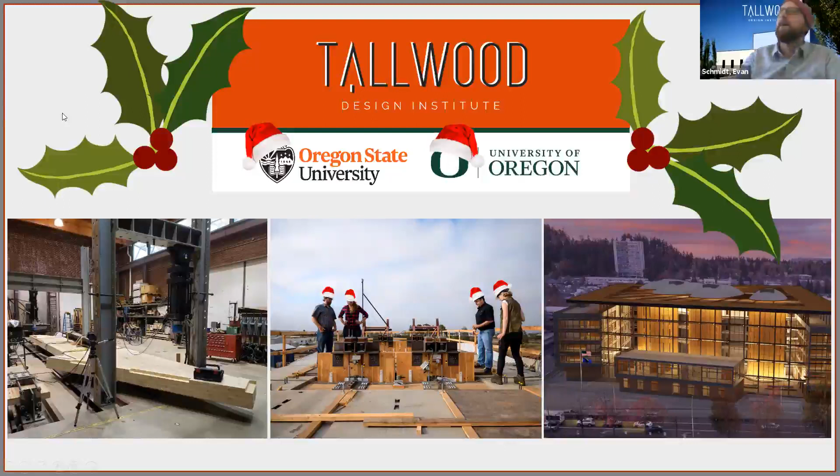I really want to emphasize that we engage in testing services. We provide testing services for anyone from manufacturers to fabricators, builders, architects, engineers—a pretty wide stakeholder base that we collaborate with on an ongoing basis.

And some of our new steel that's arrived here will be used for a 3-story test that Andre is involved in. Andre is one of our speakers today.

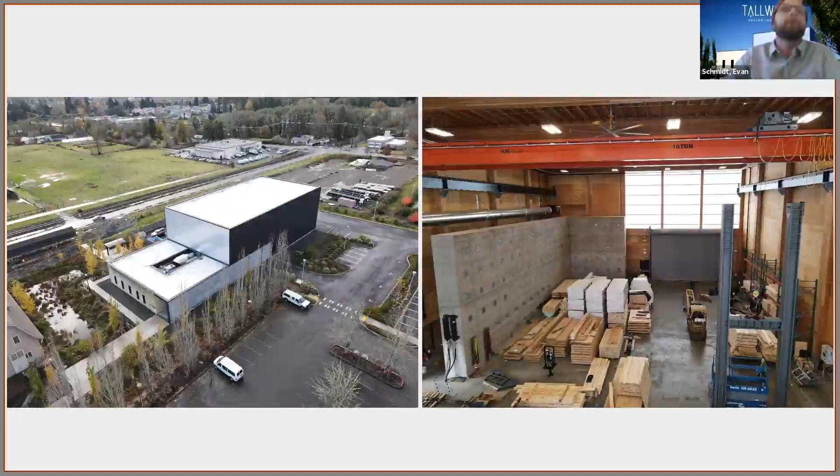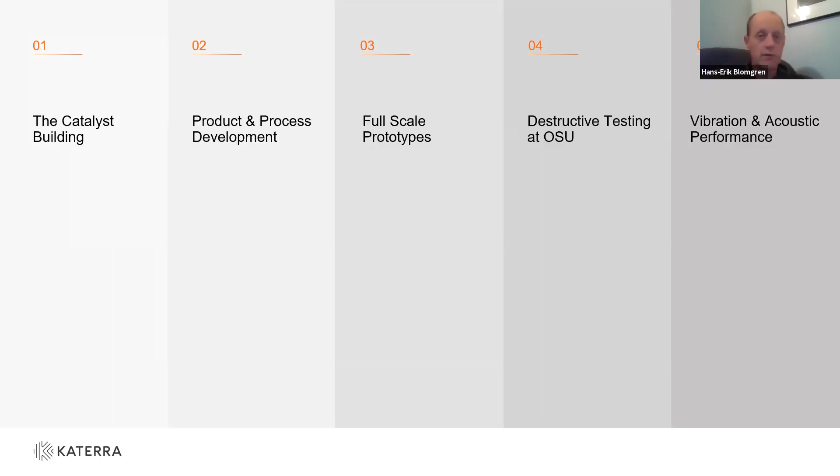I'll say also the project engineers of record, KPFF, are on the call. So when we get to the vibration and acoustic piece at the end, I've got one slide to prompt Reed or Jack to give a summary of how they approach the analytical vibration modeling for the floors. So with that, I'll jump in.

At this point in time, Catalyst had its grand opening in September, so we can now look at the building completed, even though that's not the way we had designed the product. It all happened in parallel, right? But it's a large scale, largest, I think, mass timber project in the state of Washington. Office and education use, that 30 by 30 foot column grid was a key driver identified early on, where in an education building, you've got to have that 30-foot span in a bay to create classroom spaces.

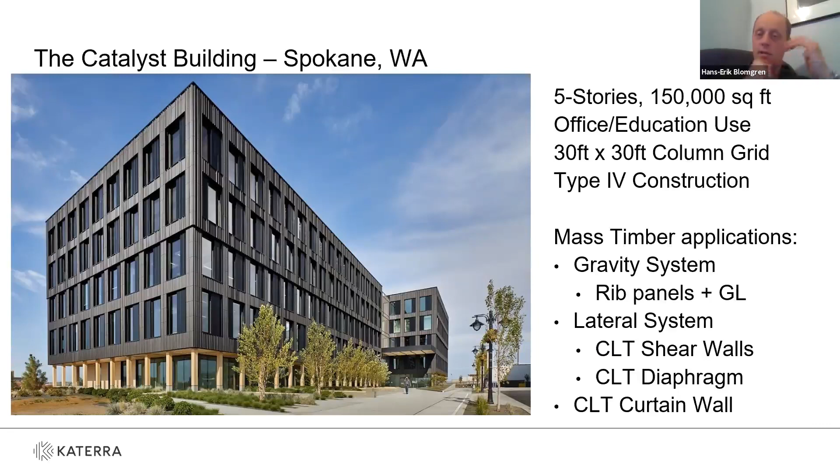A quick study in what would be a long talk to really highlight all of the timber applications. The gravity system is rib panels and glulam, which we'll focus on today. But the lateral system, which Reed has given this group a snapshot of in the past, is CLT shear walls. The CLT floors themselves are the diaphragm. So the design method used by KPFF utilizes the strength of the wood. And there's also a cool curtain wall system.

Run through a few pictures of the floor plan. A disciplined layout with 30-foot grids on the columns in both directions. The middle bay is then split with a glulam beam. So the CLT there is just a 5-ply spanning 15 feet. You can kind of see a dashed beam below, maybe over there. And then we go 30-foot spans on these bays with the rib panel. The core wall fits 14 feet wide, to allow a walking corridor and a high bay space for building services routing through the floor.

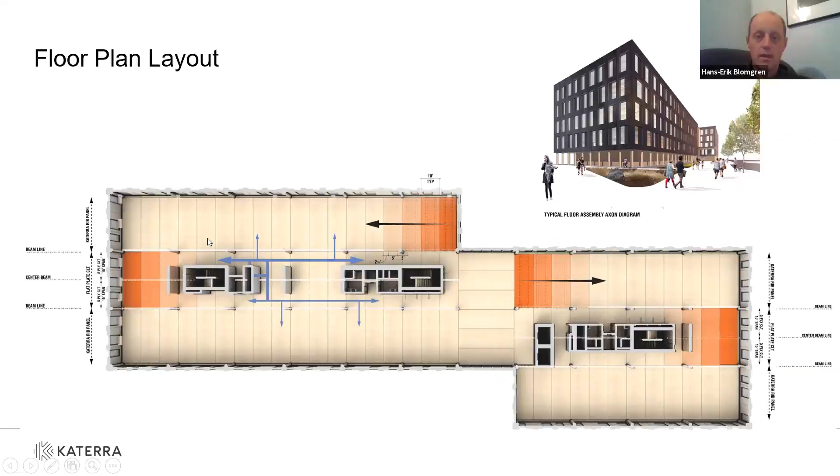Again, during construction, a lot of wood, all ground up, super exciting to finally see a project like this through and be a small player in it all.

Roughly 375 rib panels on all 5 floors. And then with the CLT panels in addition to that, those are all about 10 by 30 feet size. This is the first project we delivered our first 5-ply to. So our panels were defined around the first product we were going to produce, day 1, literally. So we had a 5-ply in the mix there. Obviously, we're certified now on 3 through 9-ply, but it was quite some nervous days. I was bald before I started at Katerra, but mine had gotten a little balder with some of the timing issues to deliver on this project.

50 rib panels a week were manufactured in our factory over an 8-week span. So the production of these rib panels exceeded the erection rate on site, but it went up fast. It was all off-site built, and it's a cool story.

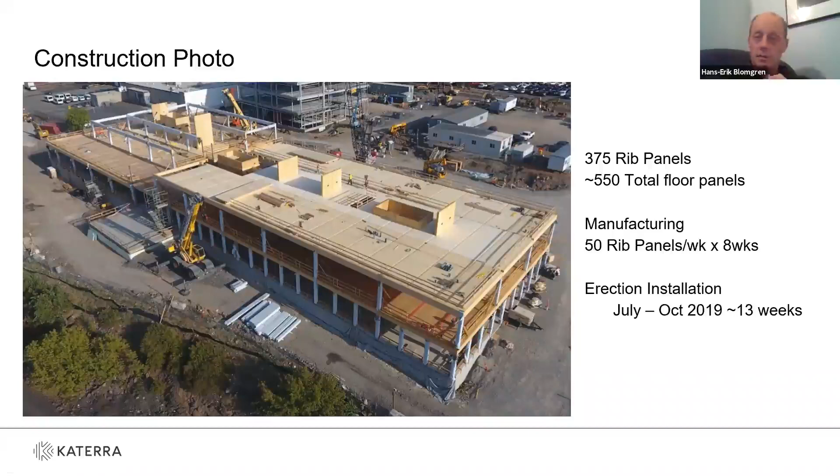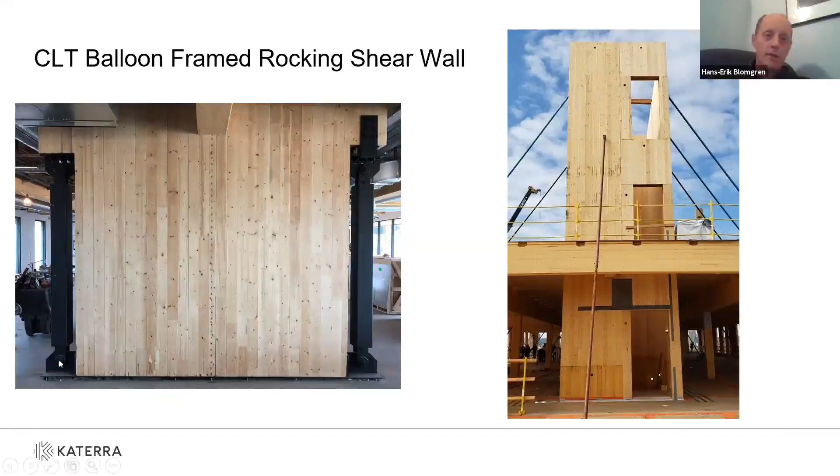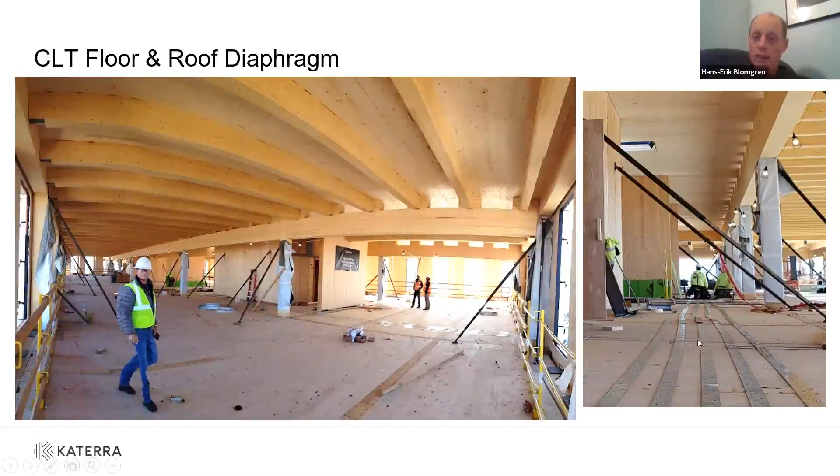Quickly, there's the lateral system: rocking walls, 5 stories tall, 14 feet wide, nonlinear static pushover analysis on the BRBs as the hold downs. That's item 1. The CLT floor and roof diaphragms were the diaphragm. So spline joints on the floor, Simpson strapping, collecting loads back to the core walls.

The curtain wall was partially built off-site in a factory near the site. So the CLT is a 3-ply backing, insulation, rails, all pre-installed. Here's a panel going up, 2 stories tall, nice connections to the supporting edge beams, and you can see the finished product there. So again, that was a whole product level of development that, well, 1 slide. We're not going to talk about it today.

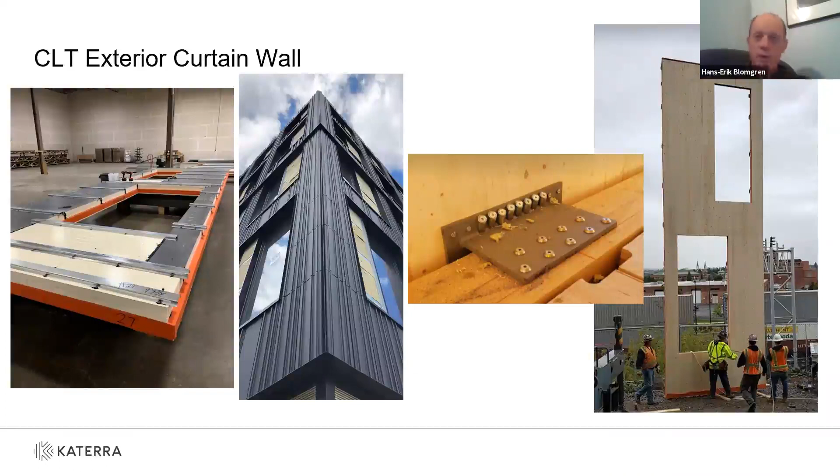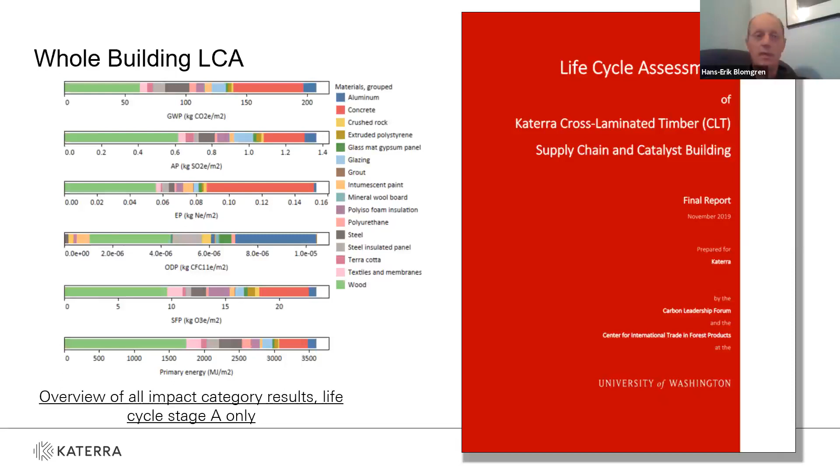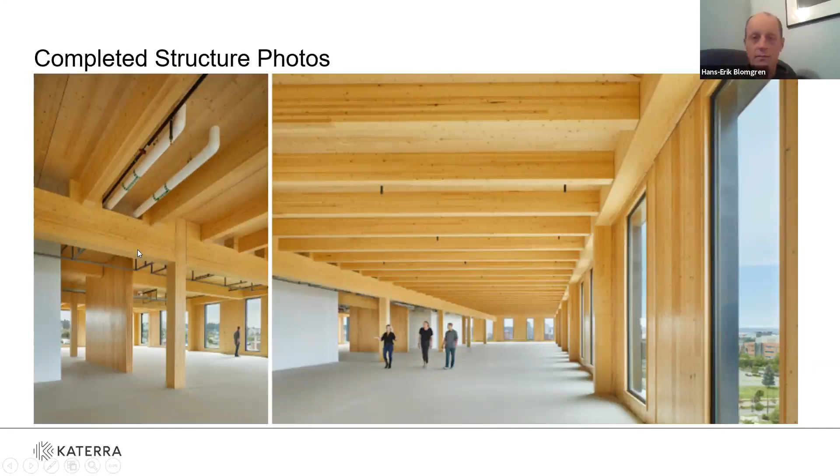So product and process development, coming from practice, being a structural engineer. I can remember very early on at Katerra, just kind of like, okay, there's that motivation to productize things and everything we do, and really appreciating how inextricably tied process and product are. And that's maybe a primary theme of this next section: as a structural engineer, I can draw anything I want. I might know enough to know that I don't know how it's going to get built or who's going to be in charge of that.

But here, you had to own it on both sides at Katerra. We couldn't just spec something and pitch it over the wall and expect another group at Katerra was going to be able to build it efficiently. Continue back and forth, working collaboratively with the manufacturing and building team.

Also, I just remembered in putting this talk together that I used to work at Arup. I can remember 5-6 years ago, the first time I really heard about a rib panel or this sort of build system, actually timber concrete composite in this case. Here's a building you're probably not aware of, but as we know, Europe's out in front. This is a 9-story or 7-story mass timber concrete hybrid building.

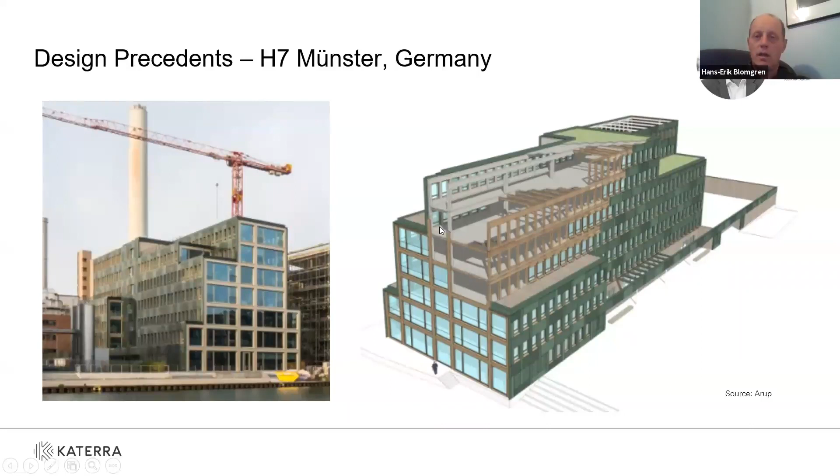And you can see here, hard to find information on this building, but I remember when Karsten from the Berlin office gave this talk once, and it really helped me understand for the first time the way this can work. So, glulam members going to a hybrid glulam frame on the perimeter, concrete system elsewhere. And in this case, concrete flooring. This is the way the fit out looks.

And unique to this building, these were actually precast concrete floors with holes, angled grain holes for a screw. And then on site, they put the precast down with the wood and they drilled, I guess, partially threaded screws that had already been inserted in holes in the precast to create the rib panel composite action through the fastenings.

So there's motivation and precedent, and it always feels good when you're doing a project and somebody else has kind of done it already. You know you can probably get there yourselves. Also, this is commercialized in Europe. KLH has a rib element in their product line. So again, the motivation for seeing this at a factory scale.

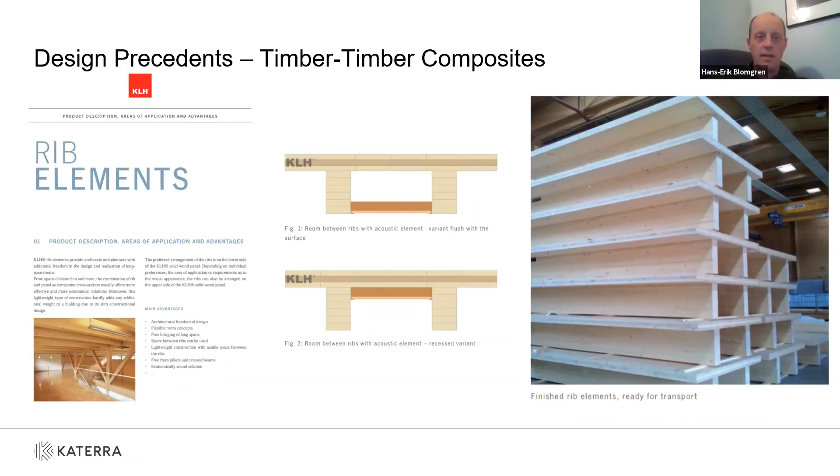We know KLH very well, good friends. Well, at some point, they weren't going to quite tell us all their trade secrets on how they did this, but it left us, again, with some justification that we're maybe developing a product that's going to have a marketplace.

We also tracked Clemson University. Eric Gu might be on the call, now works at Holmes. He was at Katerra at the time. And lo and behold, his PhD thesis was developing timber composites with, here I call it the Roman numeral 2 beam, but they chose this layup. You can see all the angled grain screws.

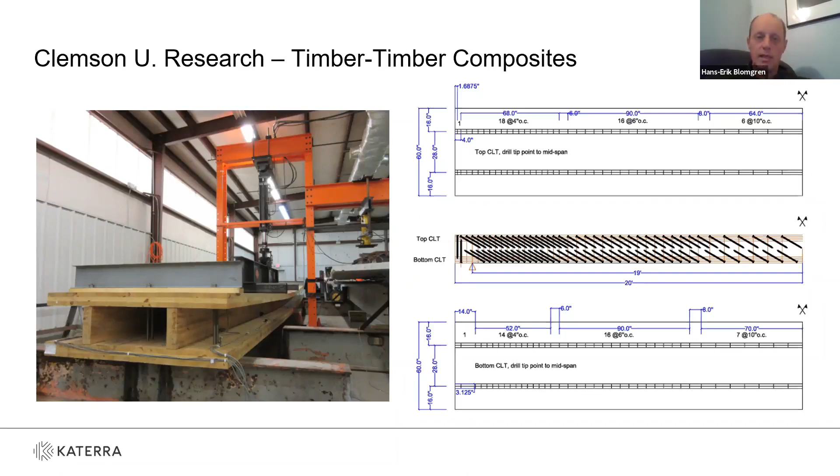This large scale test was built off of smaller scale tests, where getting to the data to do this timber composite, you really have to understand the strength and stiffness of the fastening system you use between the underside of the CLT and the top of the glulam beam. So they did a body of good testing that got to a range of stiffnesses and load deformation curves. So when we were in our early analysis phase, we could use some of that data.

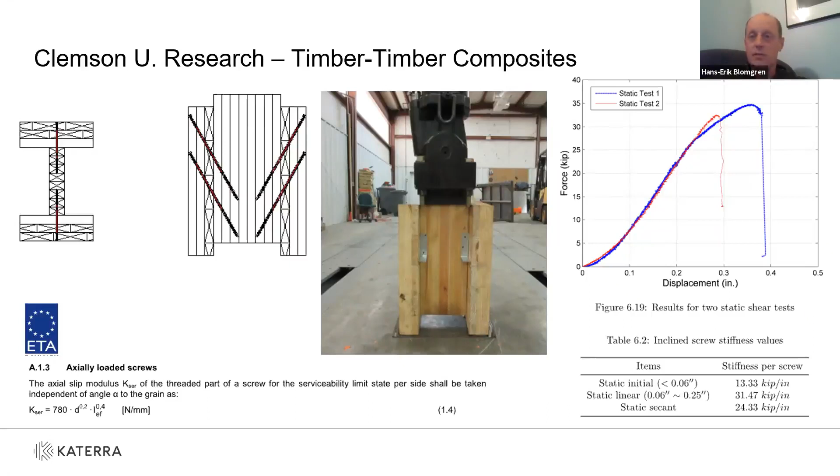Also, in the European technical approvals, some of the threaded screw manufacturers do provide an axial slip modulus, KSER, which is simple math there, but gives you another way, in the early analysis stages, to get a sense of what that stiffness is going to be, so you can start proportioning your elements.

Also motivated by TU Graz screw press glue composites and some adhesive manufacturers we talked to along the way in Europe. This is looking at ways you can clamp the wood together with that partially threaded screw. I believe you can maybe get 20-30 psi of pressure, and then you can put your adhesive in there, and then the adhesive becomes the structural load carrying element, and the screw could arguably be removed once the glue cures, or at least it's there as a reserve capacity in the event of maybe a failure, or maybe a fire load case. If you don't believe your adhesive can hold for a fire event, you still have the protected screws, that sort of thing. So this is a publicly available paper.

And adhesive performance, when you start to use it structurally like this, is not an easy thing. It is heavily standardized, right? The legacy of 100 years of glulam in the US has, I don't think it's putting it down, but sometimes you learn from experience, right? So over time, the performance specs for adhesives get more and more stringent. So strength modulus, shear modulus, moisture durability, freeze thaw durability.

In this case, if you can't bring the product close together, gap filling properties of the adhesives are unique, and fire performance. So you start having a lot of pieces on the table here as you try to find a way forward for something that's going to work for our project. And you really couldn't shortcut. You had to consider all of them and make sure you had something robust and a product that was going to work for the design life of the building.

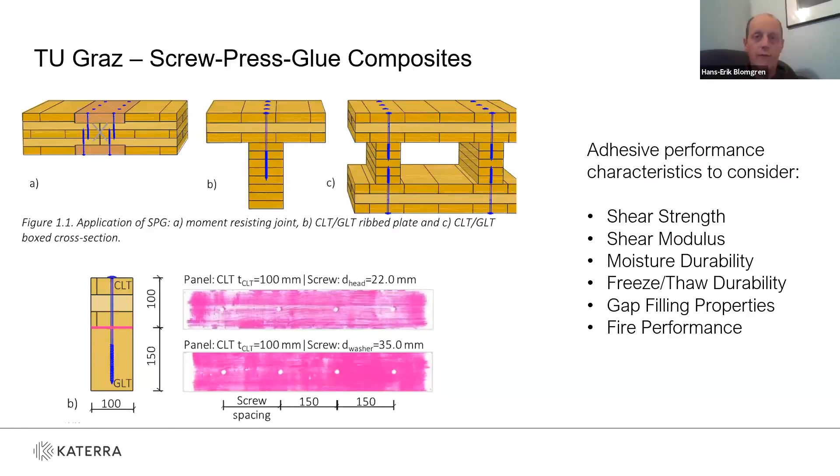Again, on this project, because of the factory, instead of a 3-ply, we really started with a 5-ply CLT panel. And these panels span parallel to the glulam beams. That's also an early move that isn't first thought of. You usually lay the panel transverse to the beams, but now you get more of the CLT section working for you as a flexure element. We had a 5-foot module, acoustic mat, and topping. So again, the structure is the wood. This is all non-structural toppings to give you maybe enough mass for vibration and the acoustic separation.

Modular offsite, efficient use of wood fiber, lightweight. These are kind of the rough numbers if you're going to be a steel composite system, concrete, and wood. So lightweight is an attribute. And we got to 30 feet, whereas a 5-ply CLT would be hard pressed. At least the 5-ply we used would come up short of 20 feet for sure, 15 to 20 feet, somewhere in there. And because we used a good composite action, we got a great span to depth ratio on par with steel.

So that allowed us to bring the ribs up tight and maximize floor to ceiling clearances. We still did get a hole through the beam allowance for sprinkler penetrations to run transverse, a 4-inch diameter hole. And the stiffness is king here. You'll see that. So the composite action we got with that shallow depth met a stiffness criteria.

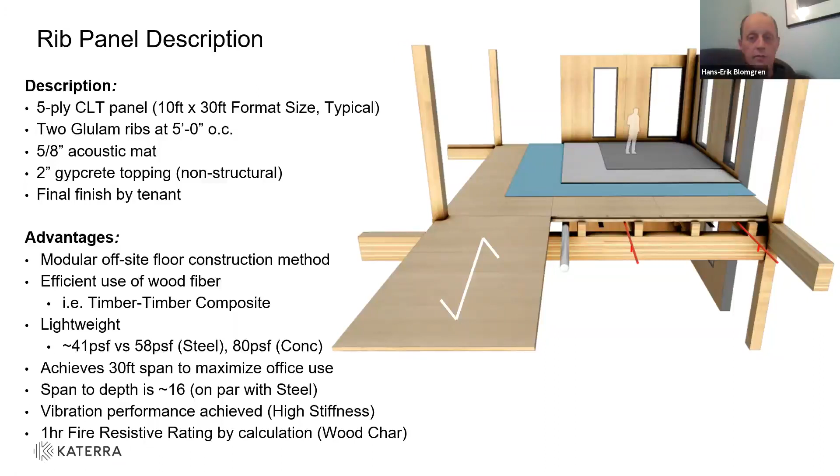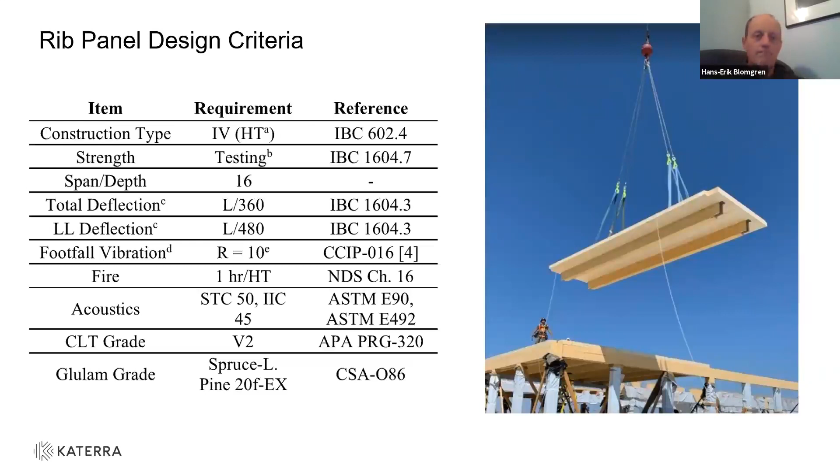And I believe through a 1 hour char rating, you could do the math on this panel, and it works at 1 hour. The project was actually heavy timber, so for permitting we didn't need to directly justify that. So the criteria with code references are all shown here. I won't dwell on those too much.

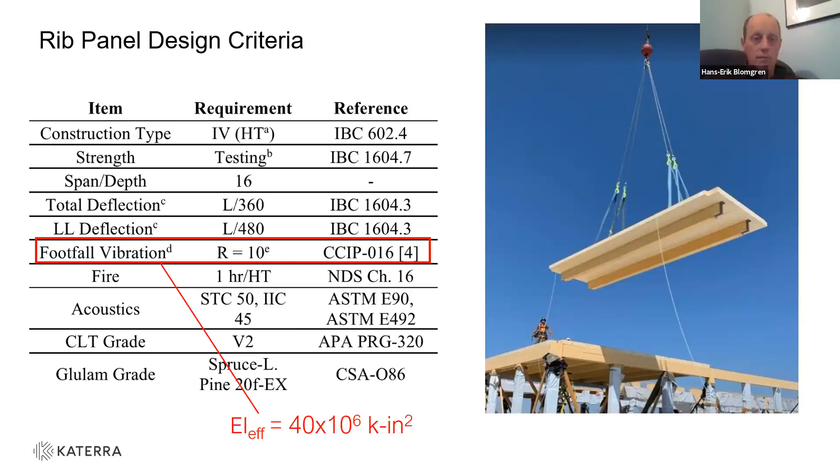This piece, though, became the final performance criteria piece once KPFF finished their design. Performance specified this product out to Katerra Engineering. I was the one who kind of stamped this as a performance specified engineered product that in turn went through shop reviews and was reviewed by KPFF and submitted through permitting, like is kind of a common practice for a lot of structural products. And this magic number, which just fits this project, was the minimum target stiffness we needed to achieve to in turn know that KPFF's vibration analysis was met.

A lot of text on a couple slides here. I don't usually do this, but really capturing why testing, well, I'll step through my points here and maybe the point will come clear. I really think this is the first application of this kind in North America I'm aware of. So let's know what we're doing with some data.

There's no defined method in the IBC. So how do you actually design a composite T-section? You can't point to a design method in the code. Chapter 1 of the IBC talks about alternative products, alternative materials, and alternative design methods. So we didn't have a way to design it, maybe in the NDS. We want to just, again, test this so we know it works and we can stand behind it as a product that's going to meet the intended life span of the building.

Appreciate behavior, stiffness, creep gets measured, as Andre will show you here. And get good correlation between our model, which we did have, and testing results. The adhesive itself that we used wouldn't necessarily be classified for this use. So let's build it into a test so we can product test it. And testing serves as evidence for approval.

And this is that little piece of the code, chapter 16, it's there, but maybe you've never noticed it. There's a pre-construction load test in chapter 17 of the code. And this is when and why you should use it. And I'll make a point that when the code is a minimum and it says shall, it's kind of hard to wriggle away from that. So we went for it because we're also motivated, again, leveraging this story to future projects.

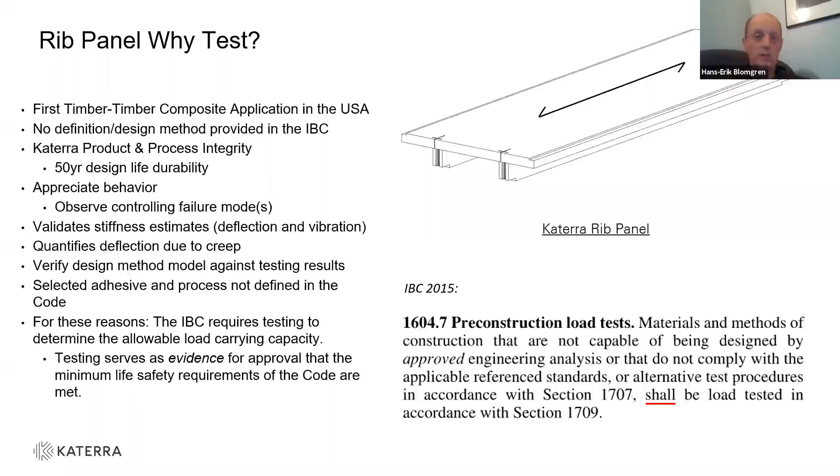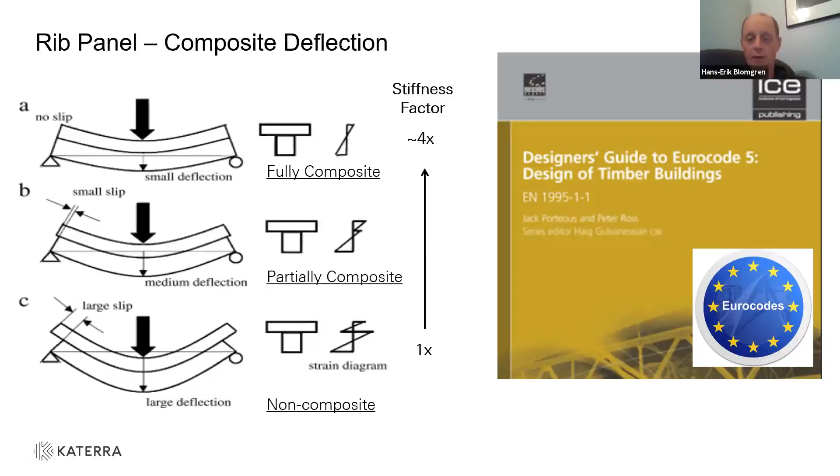Quick analysis, this is kind of when you have bottom up, if the two panels aren't fastened together, you get larger deflections and you get slip between these two layers, CLT and glulam. Then you start adding stiffening elements, you're somewhere between the two, and when you're fully fixed, you get full composite action. And for our project, this changes the stiffness and strength factor actually on the order of 4. So all of a sudden for the same wood fiber, you can get that much difference in performance. So efficiency starts to show up. And in Eurocode 5, there is a provision for the gamma method to have a closed form calculation method to work with.

Quickly too, timber fastenings, strength versus stiffness varies greatly. I'll bring this up though, because glued joints are strong, stiff, but brittle. Doweled fasteners are weaker, more ductile, and axially loaded screws are kind of classified as something in the middle space, but quite a difference here on the slope, right? If stiffness is king for your design, you can still see quite a difference qualitatively here in this diagram.

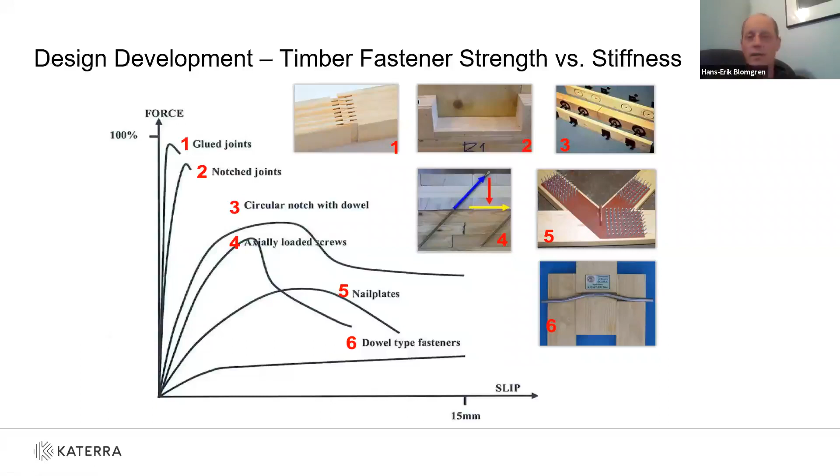Screws are not free, they cost money, they are not easy to install. This assumes 30 degrees from horizontal. And yeah, a choice was sort of made from that process standpoint, cost standpoint, and just efficiency of the whole cross section. Even squeaky floors, you wanted to almost put an adhesive in there to make sure you didn't have squeaky floors. And once you do that with the screws, then is the adhesive carrying the load? So we migrated with a lot of internal debate on where to land there.

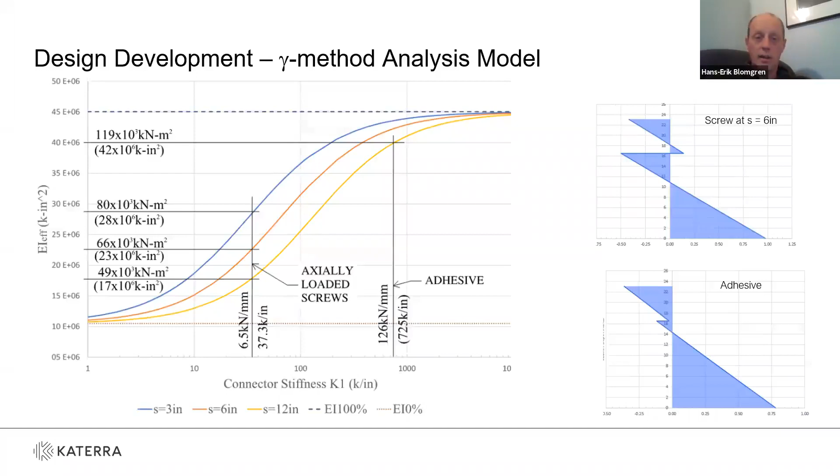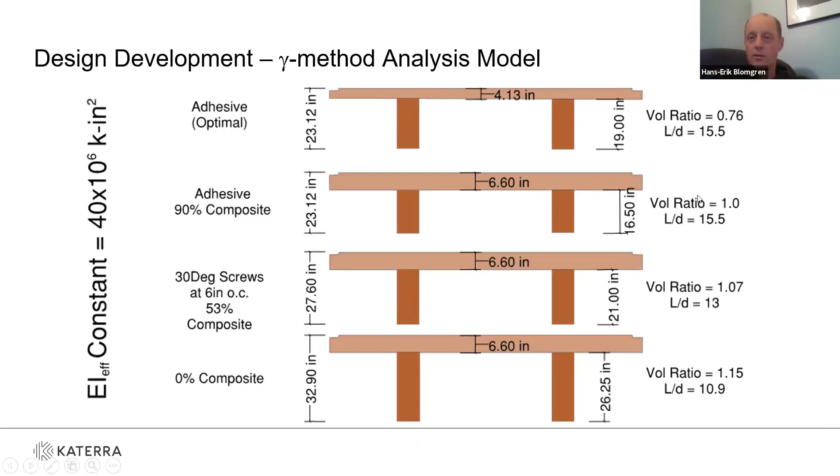With the 30-degree screws, we probably would have been closer to 27 inches. If I were to do this again on the next project, with some testing justification in our hip pocket, a 3-ply panel is a great candidate here. You could reduce the wood fiber by almost 25%, match the L over D by making your glulam a touch deeper, and get something better. So that's a little nod to seeing this execution, but looking to your next project.

Then we had the fun of going to the factory and getting agreement with the factory. They used their space and talked to the people that were going to commit to writing the procedure and plans for doing this.

We had 2 candidate adhesives and the screw press glue option at that point. One is actually a listed, commercially available PRF kind of resin. It has gap filling capabilities. I made sure my friend Josh here had his hazmat suit on, because occupational safety issues would require this as a respirator. So that was kind of a point against this.

It was great for the factory folks to be engaged in this, because we also then looked at commercially available bead extruded high viscous adhesives. You'll see a conventional construction adhesive - this is what we could buy at the time - but it kind of met the principles of what we were going to do.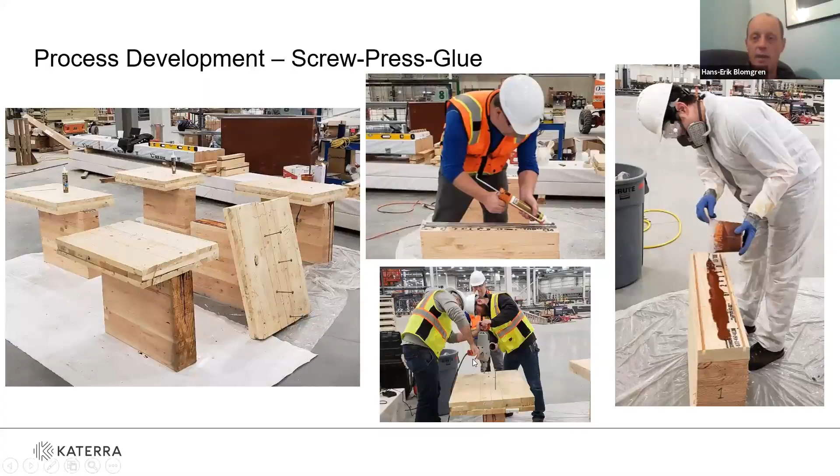We ended up using a little higher performance adhesive, but it got everybody hands-on, screwing it down, watching it squish, taking it off, and getting some of that feedback.

This adhesive, if it flows, runs down the side of the beam. This had to be an architecturally exposed solution. How are you going to clean that up? Cure time - all those variables of process and amount of effort it would take.

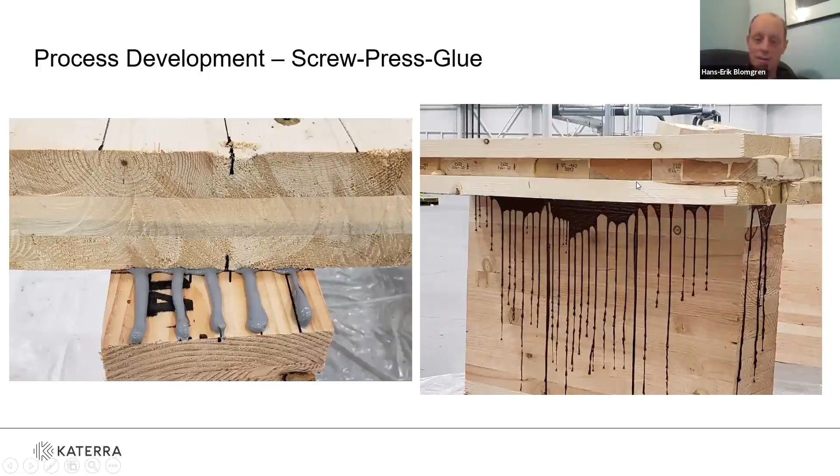It was clear at that point that the factory folks for this project, and the processes we could put in place, were going to strongly encourage us - in no uncertain terms - that this one wasn't going to be viable. So even though maybe it was easier to justify technically, I could have specified this, but I would have been ignoring the appeals from the people that actually had to build it.

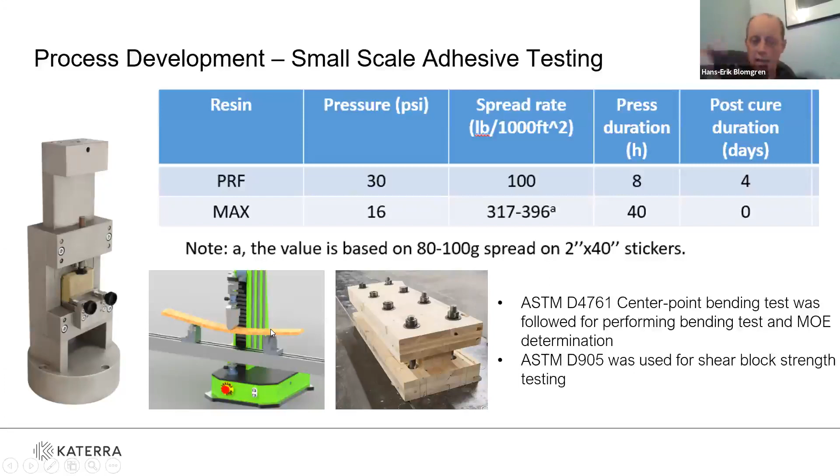We did some work then. Washington State University did small scale center point bending tests with those 2 candidate adhesives. I don't want to dwell on this too much, but this was another key piece of building this up, where we wanted to justify what the modulus of the adhesive was and what its strength was at this small scale, before we built up to the big testing Andre did. It's so valuable to get some of this data.

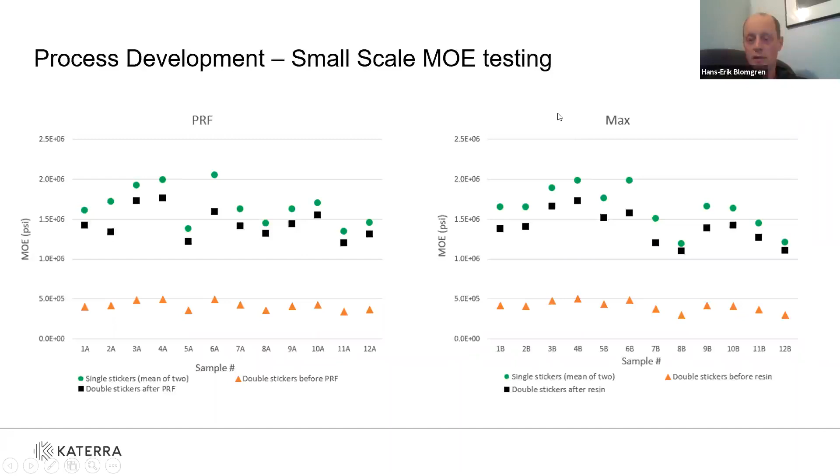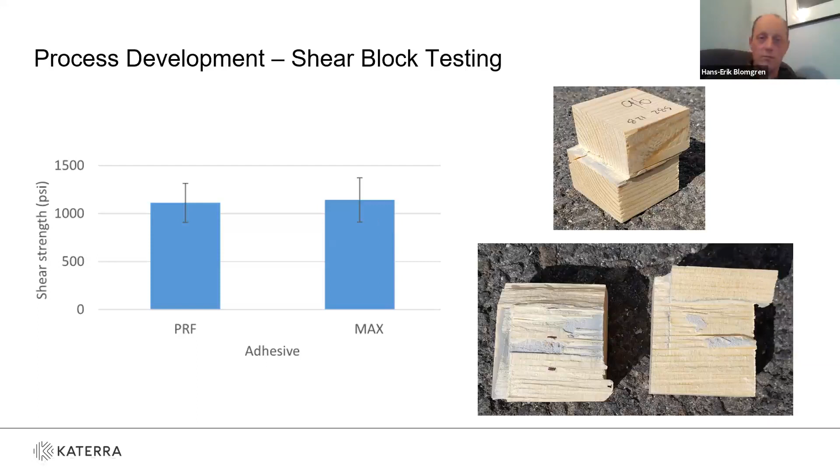That was a great point to trend towards the one that was going to be preferred from the factory process standpoint. We also did shear block testing of the 2 adhesives, and again, they were very comparable, impressively strong, because the in-plane shear strength of SPF wood is roughly 1200 PSI. So the strength of these resins came very close to the strength of the substrate, which is, again, where you want to be from a maximized efficiency on the adhesive.

Then we got into building 6 prototypes. This is crazy - this was May, 2 months before the first panel went up. So this is where, again, we were moving fast to deliver to a project on time. We built a process and engaged with labor on site, where we could apply glue to 2 glulams on roll cases on a motorized roll case. We could set up a glue station to apply the glue in one pass.

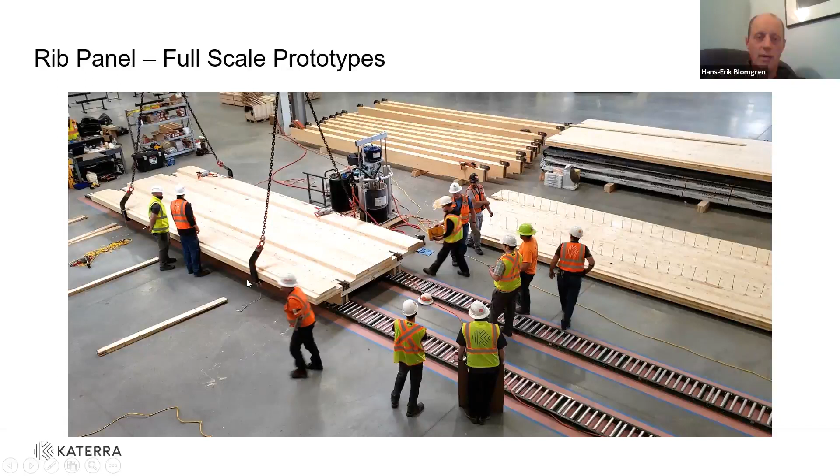We had master carpenter Olav here, who was essential as the foreman for this project, along with overhead crane access and conditioned space.

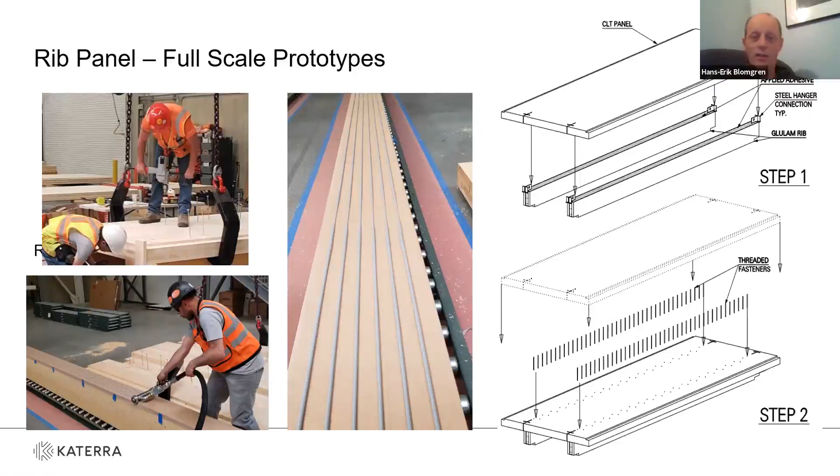Here's a picture of the glue spreader going down, the screwing process. This is the kind of bead you can get versus freehanding it. Super cool to get it down to 6 beads at once, and pretty simple once you get a good plan in place.

Quality assurance was key. We did daily weighouts of the adhesive on kraft paper. Temperature and humidity were controlled and monitored in the factory. We were on the clock—I think we had to press within 20 minutes, getting the panels in within 20 minutes to be on spec.

We could also validate that the spread of the glue was good through some QA testing, to prove that the clamping force of the screws would press the glue out. Squeeze out was actually a good indication that we were getting good glue spread, and we limited gap sizes. We also surfaced some of the wood where there might have been deleterious material, rough spots, staples, and so on, so we had good mated surfaces for gluing.

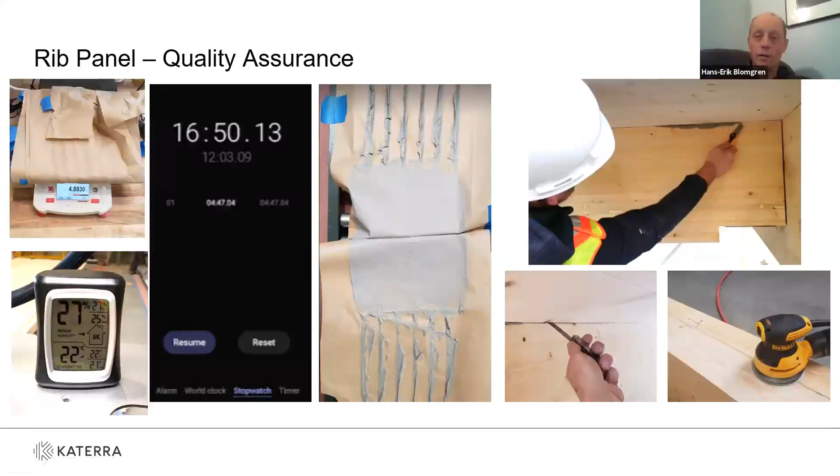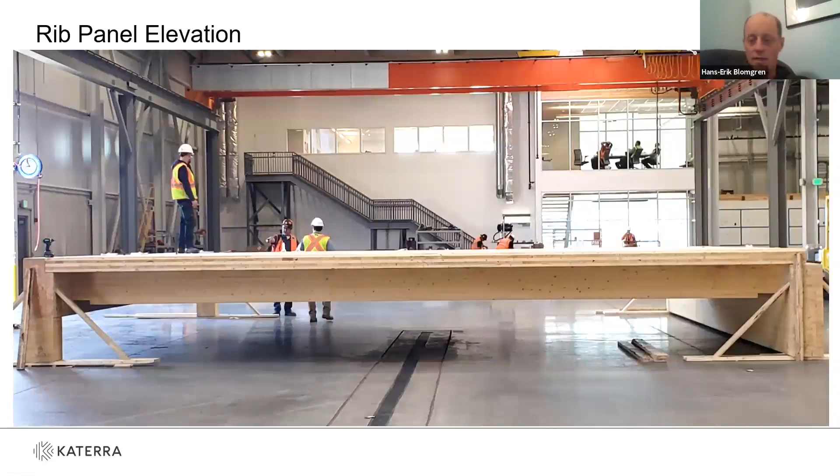I like that picture—it gets to the cross section and the profile, and really shows, for a 30-foot span and a span-depth ratio, as an engineer, it kind of looks good. It looks about right. I don't know if other engineers feel that too, but you can sense this is an engineered product that needs the double-T shape here to work.

We took 3 of those 6 and shipped them on a truck down to the Oregon State Lab, which is where I hand off to Andre.

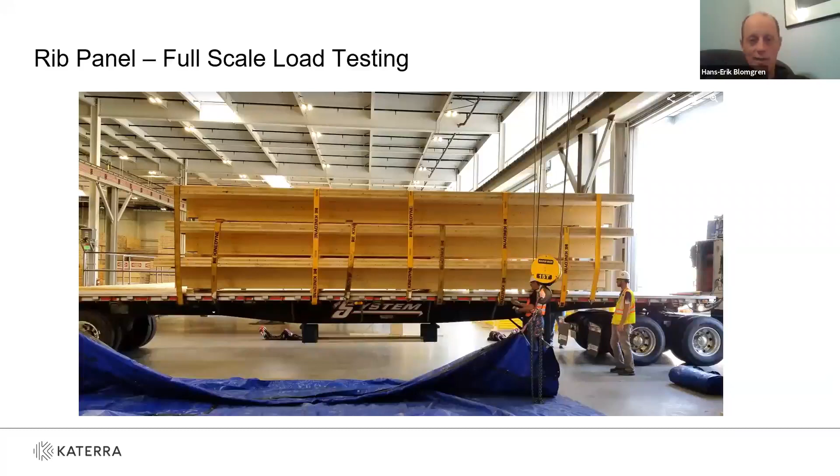Great. Yeah, so thanks everybody, and hi everybody. Andre Barbosa, structural engineer and associate professor here at OSU.

Specifically with this project, we were very happy to participate, and in a way, like many other projects, lucky that there's so much going on in the Pacific Northwest with such great collaborators. So we did take those 3 specimens.

Here is the first slide where we show our test specimen elevation and setup.

I do want to acknowledge a couple of folks quickly. First, Chris Higgins, another structural engineer in our structural engineering lab, who's been pushing and moving our lab forward so we can test something like this. And then we have two amazing technicians who make things work in the lab—we couldn't do all this testing without them.

These specimens were, as Hans-Erik mentioned, 10 feet by 30 feet nominal—cross-laminated timbers with the 2 rib panels. The loading frame you can see here in elevation is a pretty large steel structure, with a 500 kip actuator in the middle and a 30-inch stroke. I'll talk a bit more about the ends there.

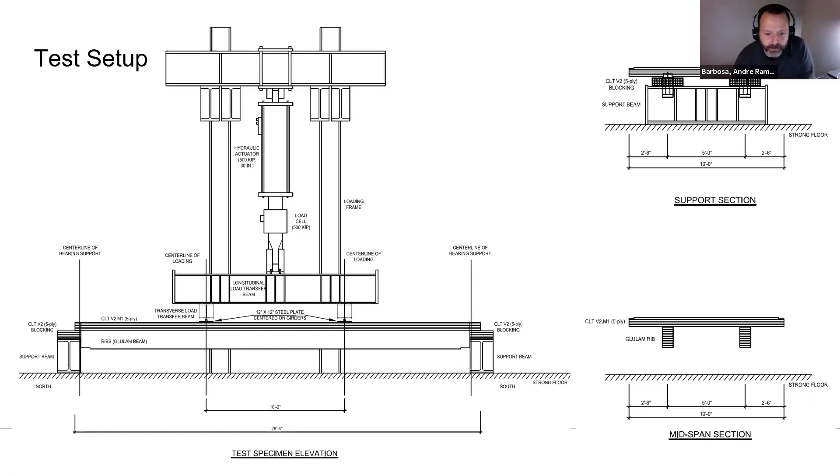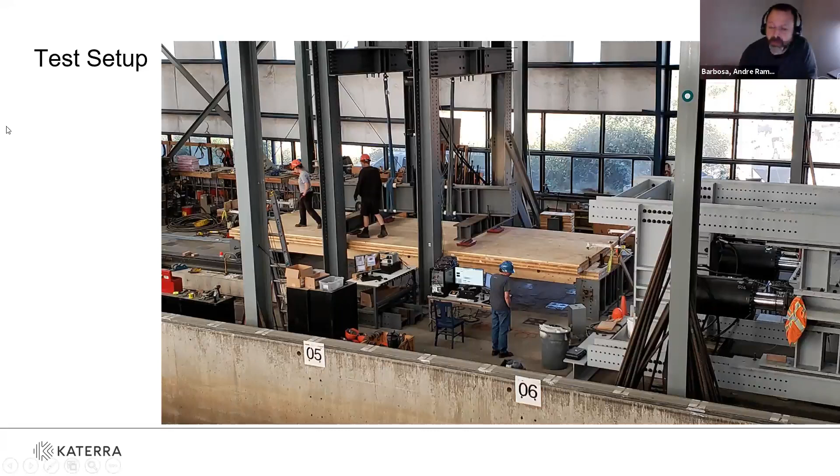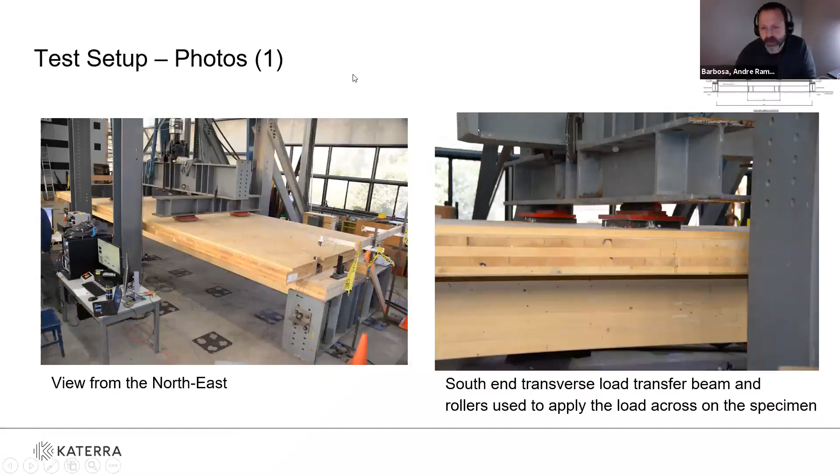On the next slide we can see a more detailed view from the northeast of our specimen. On the right figure, you can see the loads being transferred through the point where we have the rollers—that's exactly where we're transferring the load. Looking at the figure on the left, we had steel supports, but above the steel support we had wood blocking to simulate what was actually in the field, which is rib panels supported on glulam beams. We wanted enough room for the instrumentation while still simulating that end bearing condition.

If we zoom in a little bit more, especially here in the middle, as we were putting this setup together, we wanted to make sure we allowed the ribs to rotate relative to the steel beam here. The steel beam is just there as a support and should not be impacting the capacity we're developing in our system.

And then there's that little bit of an overhang on the blocking, which is that panel sitting on the steel beam. You can also see on the figure on the right, that blocking that shows where the CLT from the main ribbed panels is sitting.

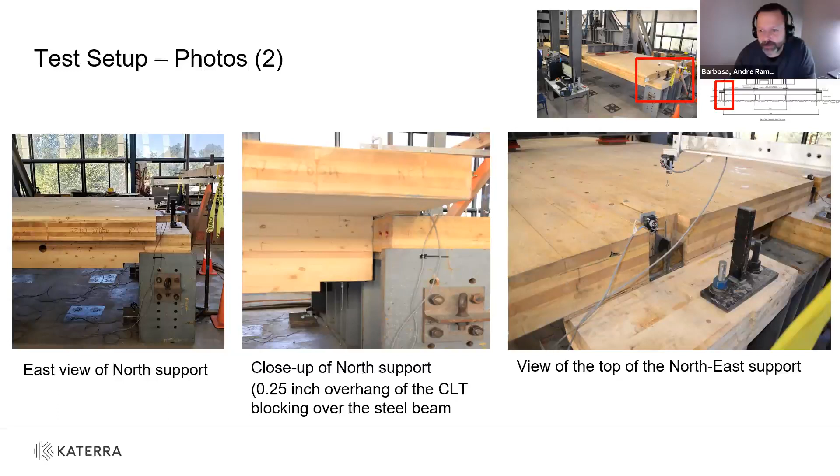Okay, next slide. So in terms of instrumentation, we had for specimen 1, and Hans-Erik already mentioned a little bit of the schedule we were working with, but it was good. We had things planned out, and I think it worked well in terms of receiving the panels and getting out a test report as quickly as possible, because the construction site was ready to go for these panels.

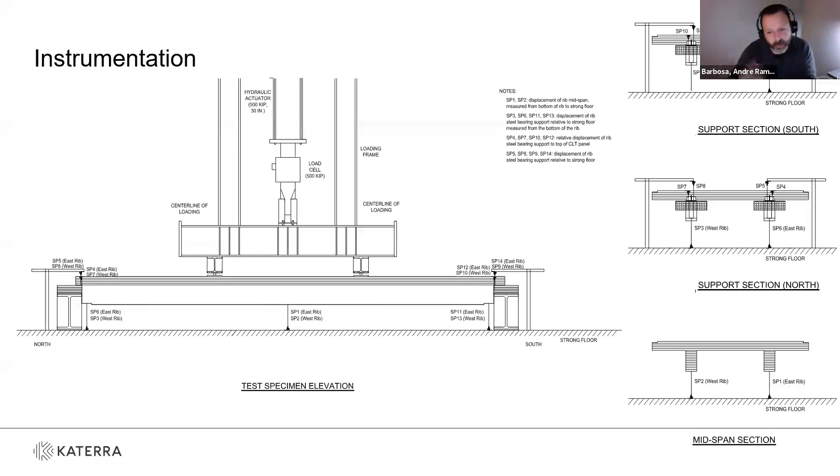We also had channels for the actuator and the 500 kip load cell there. The instrumentation for specimens 2 and 3 we're not showing here. We had some additional instrumentation also trying to look at shear flow over these specimens, but in the interest of time we're not showing those here. We're working now on a journal publication and will be incorporating those results in that.

Next slide, please. So the test protocols that we used: first, we had quasi-static loading. As Hans-Erik had mentioned, this IBC section 1709 pre-construction load test includes defining a target reference superimposed design load, in accordance with the initial design requirements and the building occupancy for this building, as well as the deflection limits that Hans-Erik showed in that table initially. Those were also defined in accordance with the design requirements.

So our loading protocol had 2 parts. One is mainly tied to checking IBC section 1709, where you do a force control test. You first increase the load to 2 times the reference design load, then hold that load for 24 hours. Then you stop the loading, record the deflections, and remove the loading. The test is deemed complete once you get at least 75% of the midspan deflections recovered — that's the immediate creep component Hans-Erik was mentioning. That's per IBC section 1709, and once that test is complete, that's what we had to do to make sure this was a viable product.

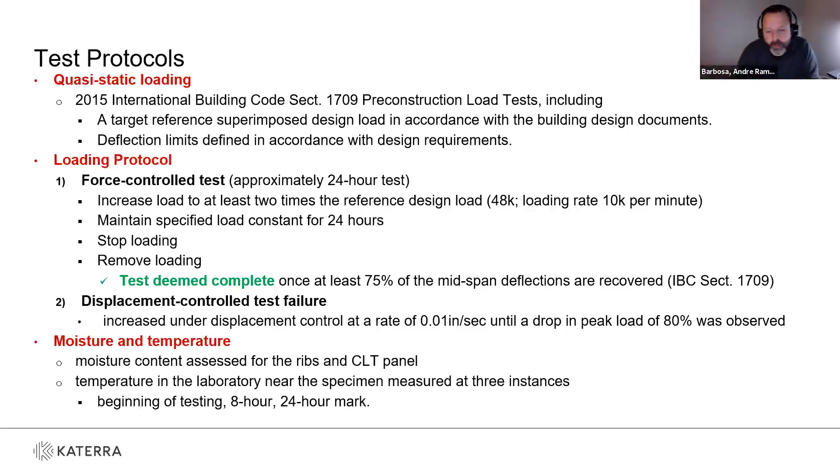We also, since it's wood, kept track of moisture and temperature. Our lab is a really controlled environment, so not as much variation of temperature, but we did check the temperature at the beginning of the test, at 8 hours, and at the end of the 24 hours, just to keep track of that. We did the moisture check just at the time of testing. Next slide, please.

So on the figure on the left, you can see the initial force control test where we're showing the deflections of the west rib and east rib. As we push on, however symmetric we wanted things to be through our loading, or things being centered with respect to the specimen, or just small variations in material parameters, there was very little difference in the deflections measured initially in both ribs. Overall that difference in deflection is less than about 0.03 to 0.04 of an inch, but we could capture that difference.

So we went to that 48 kip level and then held the load. Now looking at the figures on the right, the load was maintained for 24 hours. When I started doing this, I did not know that 86,400 seconds is 24 hours - I had to go check that. I remember the 3,600 number, but not the 86,400. The time in this graph is in seconds.

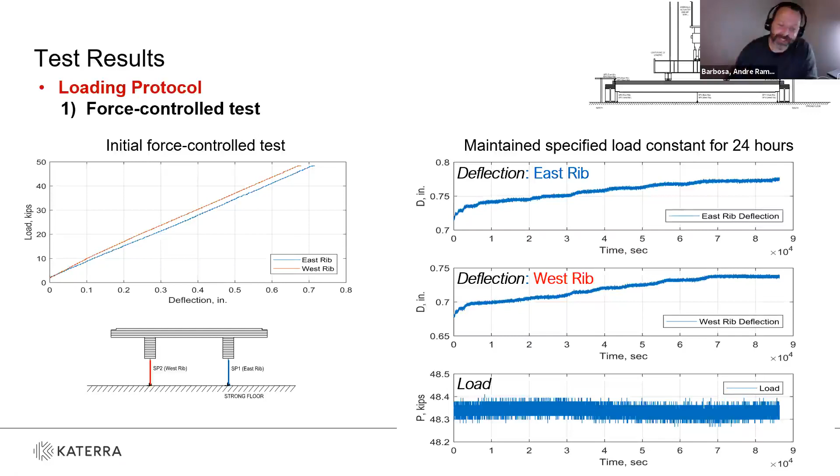Over 24 hours there was at most a difference of 100 pounds. That 100 pounds wasn't because I stepped on the panel - if it were just me, it would be about half of my weight. That was the range that was changing over the 24 hours.

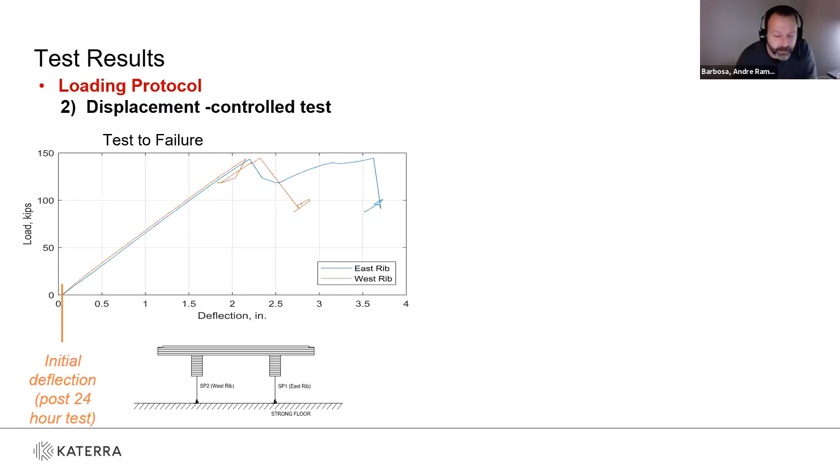If you click one more time, please - a few interesting things here to note. The specimen's peak load was at about 144 to 145 kips. Based on this load, assuming a uniform loading over the test specimen panel area, that corresponded to about 450 PSF, so a pretty large load.

During the test, some things we noted: at about 75 kips, we started hearing some popping sounds, but those were really just adjustments or motions of the screws connecting the CLT. If you look at the figure here on the left, at 75 kips there's no impact in terms of the global stiffness. We did keep hearing that as the load kept increasing, but it had no impact on the stiffness, as I was mentioning.

Based on this graph, you can get an idea of what the average stiffness is. If you take between 10% and 40% of the peak load, which is often done for our lab tests, you get about 69 kips per inch of stiffness for this 30-foot span. Calculating the corresponding EI effective for this loading gives 49 million kip-inch squared. Hans-Erik had shown you a number of 40 million - we got 49 million, so we were above that design requirement for footfall vibration. Peak displacement at that level is about 2.15 inches of deflection.

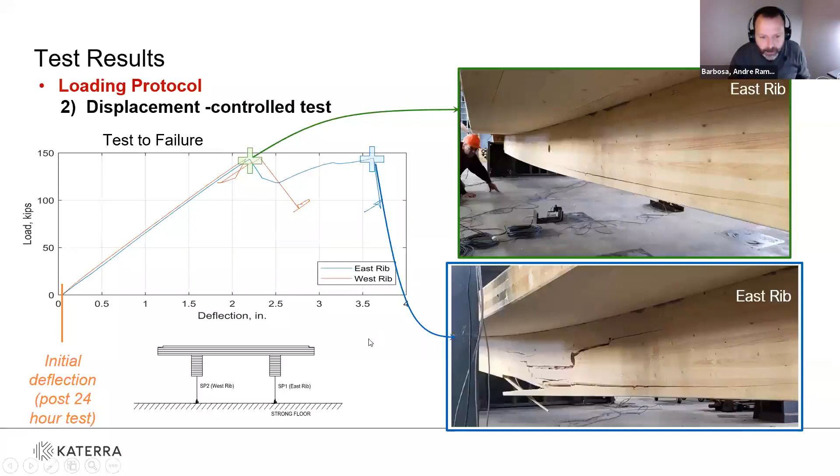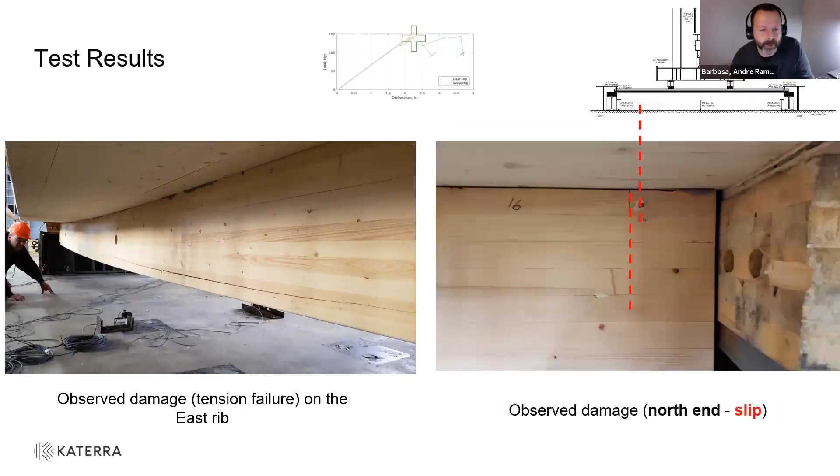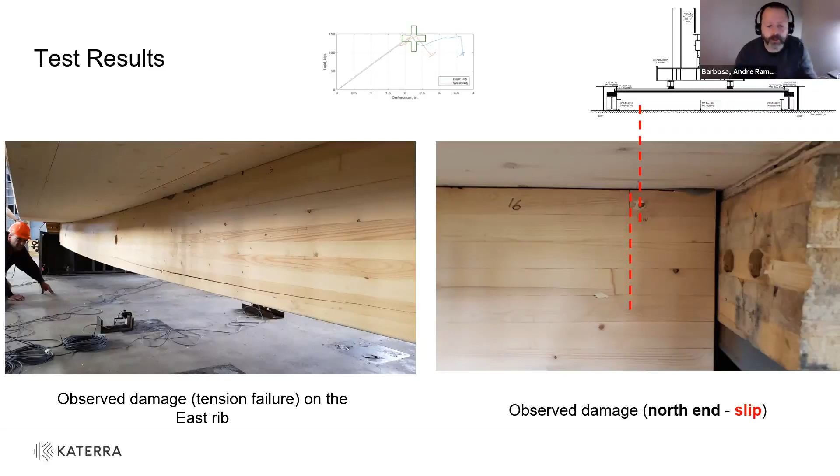Next figure, just to wrap up. Near the end, at failure, we did not measure any noticeable slip on the south end. We did have about a quarter inch of slip on the north end. If you look at the right, next to those holes in the blocking, you can see that's the total distance—less than the quarter inch we had initially of overhang between the blocking and the steel beam. That little hole is just under a quarter inch total for slip.

Yeah, I think that's it. Summarizing, we did perform that test according to 2015 IBC section 1709. Results show we recovered 85% of the deflections after the 24-hour load, which exceeded the 75% minimum.

I talked about the 450 PSF—that was about 2 times the typical office load, or factored load. This high margin on strength versus capacity was predicted, because footfall vibration was controlling the design. So we were stronger there, but that's because of what controlled the design. The 49 million EI effective on that second to last bullet point was greater than the 40 million kips inch squared, and so we met all the service deflection limits based on the testing.

So from our end, we could pass on the baton, and Hans-Erik could put his stamp—everything was good to go. I think you're taking it from here, Hans-Erik.

Yeah, thank you. And that margin came out to save us later—a couple months after permitting, we had one change order for a rooftop mechanical unit. Anyways, the rib was fine as is, and that got the load up to almost 80% of utilization, instead of this 2.5 factor. So again, for future projects, as Hardy Cross says, strength is essential, but otherwise you don't worry about it. This is the point of really wanting to understand the strength of the panel, even though vibration really controlled the proportioning of the cross section for serviceability and vibration.

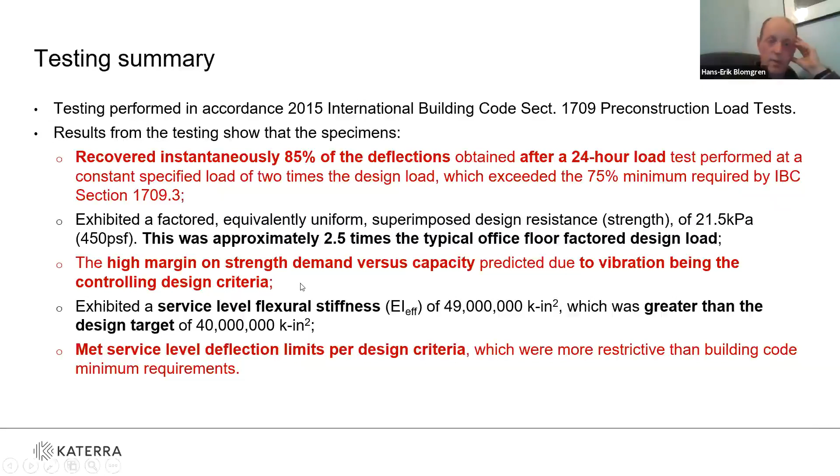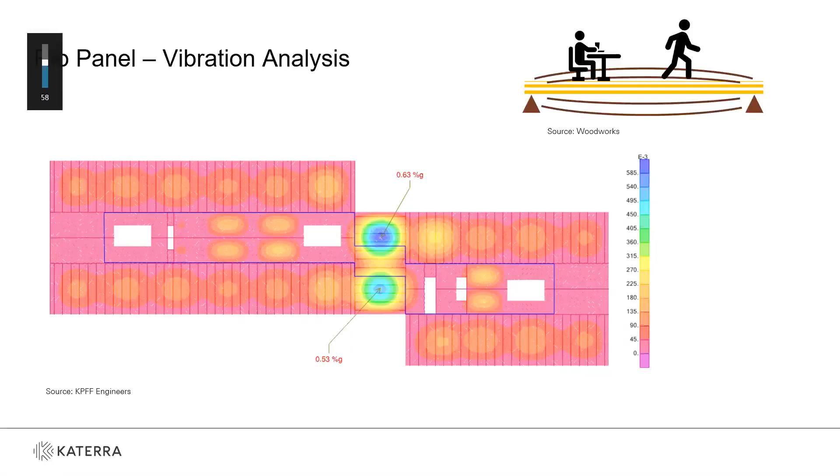Sure, yeah, I'll talk—this is Reed, hey everybody. Jack's also on the line in case, in the likely event I missed something, he'll step in and correct me. Thanks for showing this diagram. I think maybe taking, pun intended, a step back and talking about how we approached vibration evaluation for catalyst, and specifically setting that EI effective for the ribbed panels. This was our first undertaking in extensive mass timber vibration evaluation of the mass timber floor, and I think we learned a lot from it alongside Katerra and OSU.

What we ended up pursuing—this graph you're showing is essentially vibration, the acceleration value enveloped over all possible walking conditions. We looked at the areas where the rib panels existed, on the top and bottom of the screen there. We looked at a slower walking pace within those areas due to the occupancy, and a faster walking pace in the corridor areas, as you'd expect.

People can get up to a little bit faster clip when they're walking in those areas. So this envelopes sort of all possible excitation and response locations, sort of creating somewhat of a heat map. And to a degree, we're essentially using a finite element method or finite element model that is specific to determining or assessing vibration. So it's independent of the finite element model that we use for lateral design and the one we use for more typical strength and deflection checks.

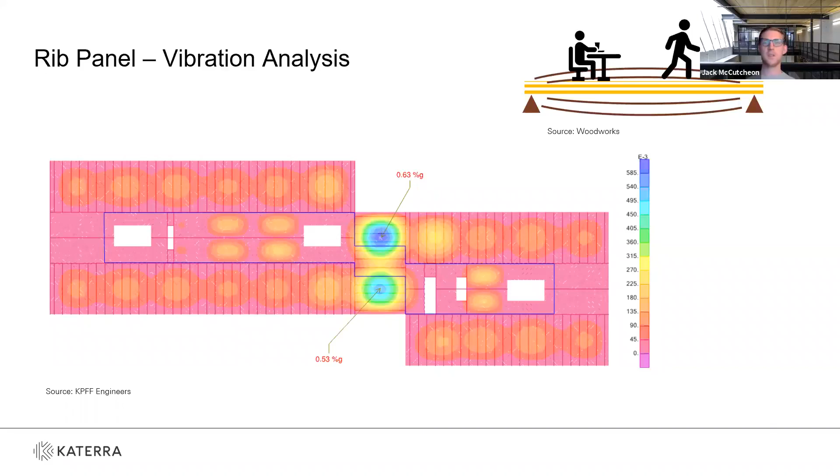Yeah, and if I can add anything to that, Reed, with these mass timber floors it's not uncommon that with a large 30 by 30 grid, the vibrations control a lot of the design just because of the lightweight nature of your mass timber assembly. You need to beef up the stiffness factor in order to compensate for the lack of mass. So the rib panels were very stiff. It was a great way to get us to a target that we were hitting.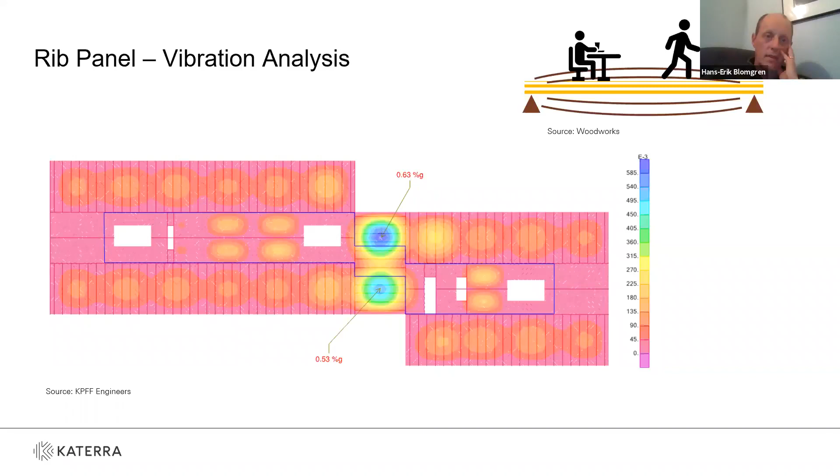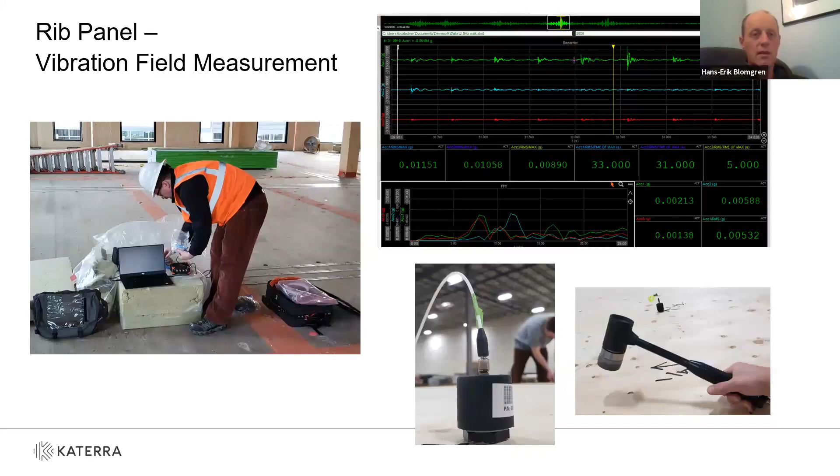We again were provided the opportunity to do field measurements. We were out on site 3 times during construction and captured data. I guess that would be this picture here. The rib panels are down, but there's no gypcrete or finishes yet. So we found a spot where there were no construction materials and looked at just that level of data. It's always good to build up your story. And we captured the fundamental frequency, damping, and then did this response factor evaluation to start comparing to the building.

With the help of others, we've published a World Conference on Timber Engineering paper. The conference was to happen in Chile in August, but it never happened due to the virus. But the papers are in, so I'm sharing it with people who want to see it. I think we'll get a chance to present on this next year in Chile, but I don't want to wait on disseminating the findings. One section at the end is on this, where we captured the vibration performance and frequency, predicted versus measured. Getting close to 8 hertz.

We have not yet done the final fit out, where some walls are in the space and the desks and chairs are in the space. So we need one more measurement. These are sort of trending towards the final built structure. I have been in the building though, in October, and it's such a good feeling to feel how awesome the floor felt. High frequency, rigid, solid. There will not be occupant complaints in this building. And we had a very aggressive design. We didn't go the conservative route on anything. We kept it lightweight, kept the frequency up, shallow span depth ratios.

There's data here. You can read the paper if you're interested. We also have product testing on our CLT done in the lab environment with companies like USG. Maxxon, a month and a half ago, paid to go out and test the floor assembly because Maxxon gypcrete and underlayment was used in this project. Early numbers are in this range. I can get you connected with Maxxon if you want to find out more, but it's cool to see Maxxon go out and test this because there's just thin data out there on field measurements.

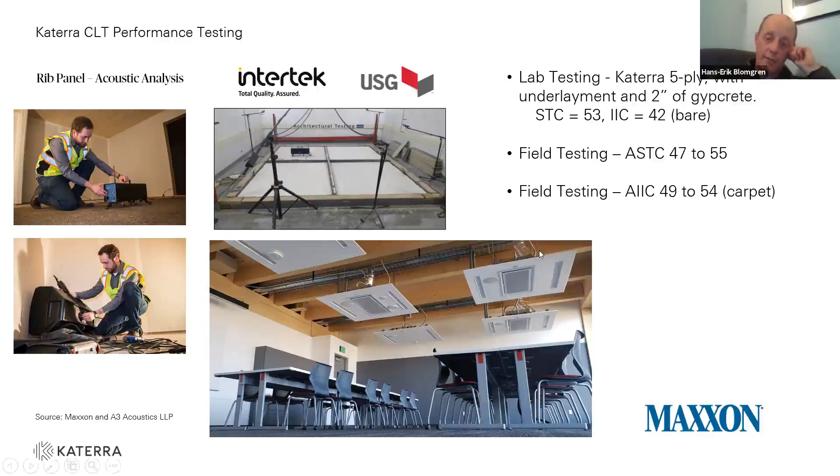Quickly in conclusion, kind of big picture, I think where I'm at after 4 years at Katerra is really, and the codes and standards are getting there better: you've got to use CLT for what it's there for. It costs money, and if you use CLT floor panels as the rib or a bare panel, get it there for the strength, deflection, fire rating, even that diaphragm. If you can get one product to do 4 things, that's pretty good.

And then you're in a place where you are supplementing the finishes for maybe vibration and acoustics, some mass and the acoustics and the underlayment, but you aren't mixing the two. And there's an efficiency there, is kind of my point. So that's where we've demonstrated that on Catalyst.

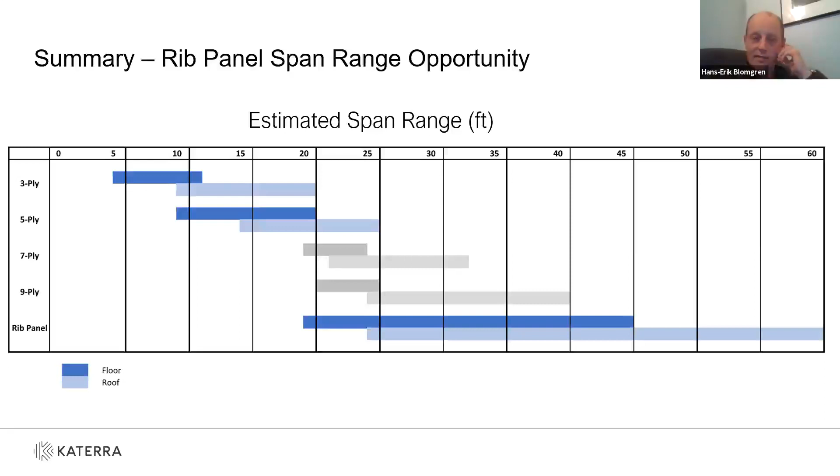I'm saying we can go out to 60 feet, but from a view of 3 to 5-ply, once you're beyond 5, start stiffening it with ribs. I don't see why you couldn't build out this product into much longer and larger spans. We need to have some projects and some work, and we have some data, we have a model, and we just need to meet the scale of the next project in those spans. 60 feet is the longest panel we make at our factory, so I did have to cap it at 60 feet.

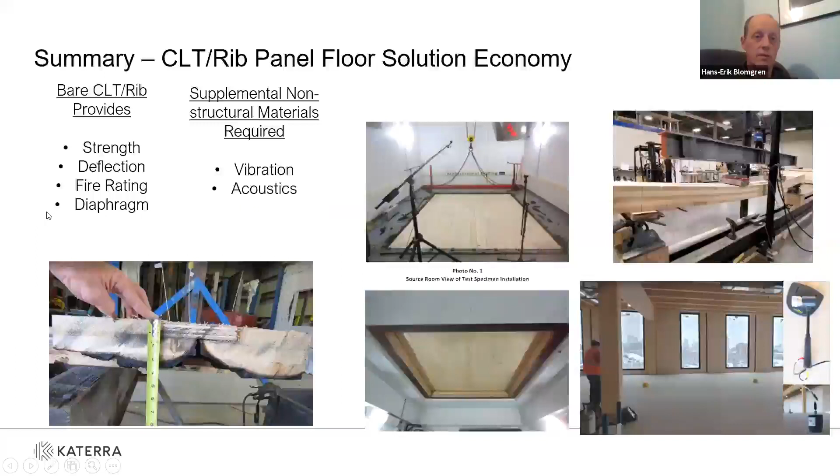Part of the overall response, what really matters are these response factors. That's where you're really going. And you have to build out a pretty big floor plate to capture all the things that influence the full fit out, right? So we didn't really have the ability to do that; even if you built a few up on blocks on girders, you couldn't really say this works already, right? Because the philosophy was we had to get the whole building built to really do the final assessment.

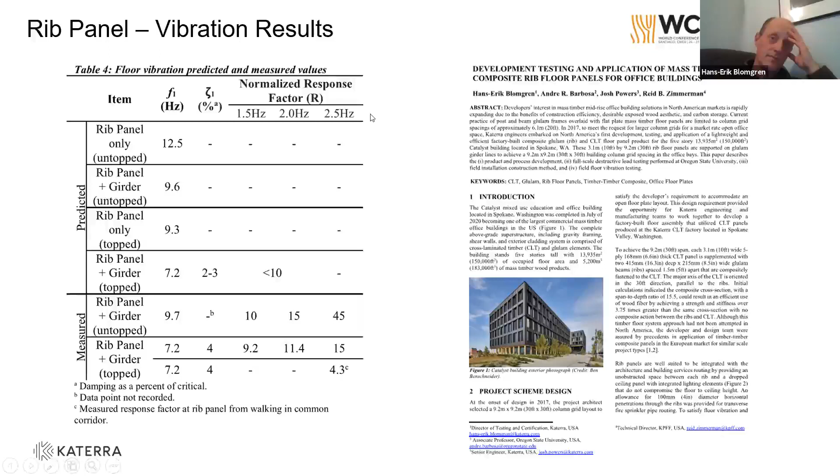And vibration, you know, there's a percentage of the population that's more sensitive to these things. After a year of occupancy, if I have time, I want to go back and see if anybody has occupant complaints. That's a thing I've seen done on other research projects.